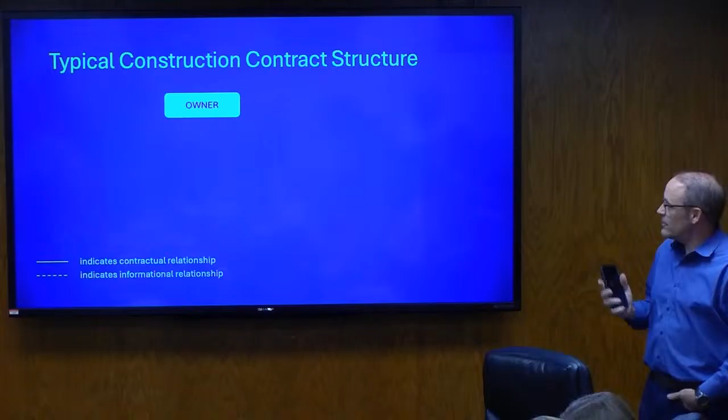So in a typical construction contract, you have a landowner who wants to build a project. The first thing that usually happens, and that's what happened here, is to hire a geotechnical consultant to go to the site and do a soils investigation, which was done here, very thorough. The next thing is to hire the design team, the architect, who then contracts with the civil subconsultant who designs the site, as well as the structural engineer who designs the building, and other subconsultants. Then the soils report and information from the geotechnical engineer is provided to those subconsultants to base their design upon.

So that's the relationship there. Then the prime contractor is brought on board. In this case it's a CMGC. We were brought on early in the project, before the design was complete, to provide consulting, scheduling, cost analysis, and constructability reviews, those types of things. And then once the project is designed, somebody...

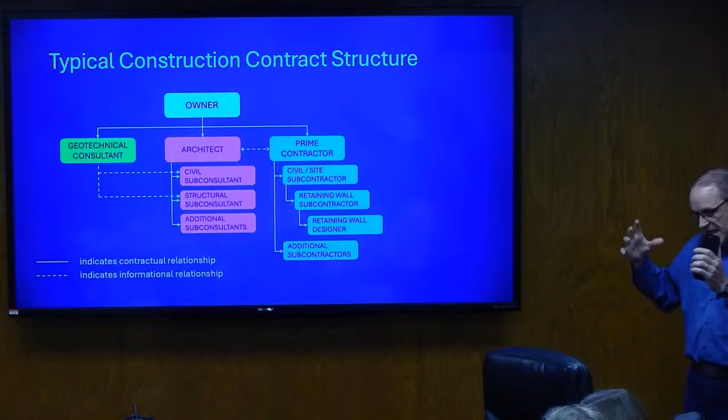For people in the audience who may not know the acronyms, can you explain what CMGC means? Oh yeah, that's good, thank you. Yes, please, if I get into the lingo, just stop me. So CMGC is a construction manager, general contractor. Typically in that type of contract, the construction manager comes on early in the design process to provide consulting, and then once the project is bid out to the subcontractors, becomes the general contractor to build the project.

So it's kind of a hybrid type contract. Is that helpful? It would fill both those roles of construction management and general contractor, as you transition from design to actual build.

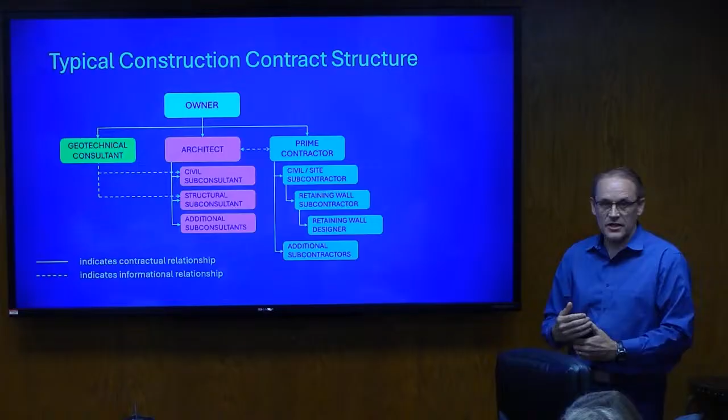We call it pre-construction services - that's before the project bids out and breaks ground, all of that consulting work. Cost analysis is really the biggest thing: cost estimating, constructability analysis, suggesting alternate systems or materials, especially with the supply chain the way it is, sometimes things aren't available, so we'll recommend changes.

Can I ask some questions about the lines? Please do. So my understanding is that the architect and you are not contracting with that geotechnical consultant - we're contracting with that consultant, and then they're just providing the information. That's correct. So if there's a problem with the geotechnical consultant, that's between the owner and that consultant, and you have no role in that.

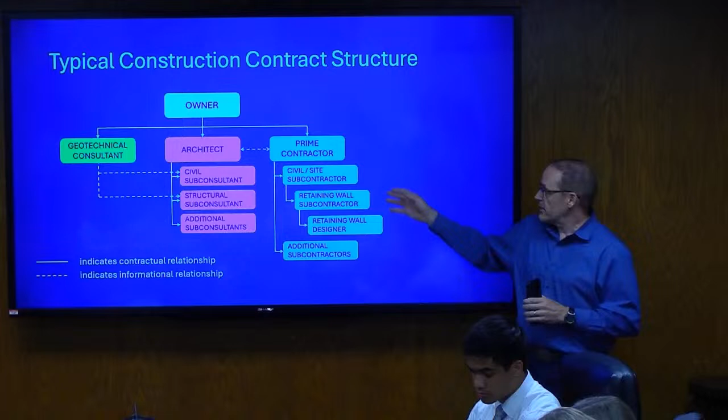Right, that's a contract directly with the district. AGEC is the geotechnical consultant, FFKR is the architect, and Hogan Construction is the general contractor. As general contractor, we contract with the various subcontractors. The civil site subcontractor is Hadco Construction, and their subcontractor was the retaining wall subcontractor that built the retaining walls. Of course there are lots more engineers and subcontractors, but to simplify, that's the orientation here. Is that helpful? Any questions so far?

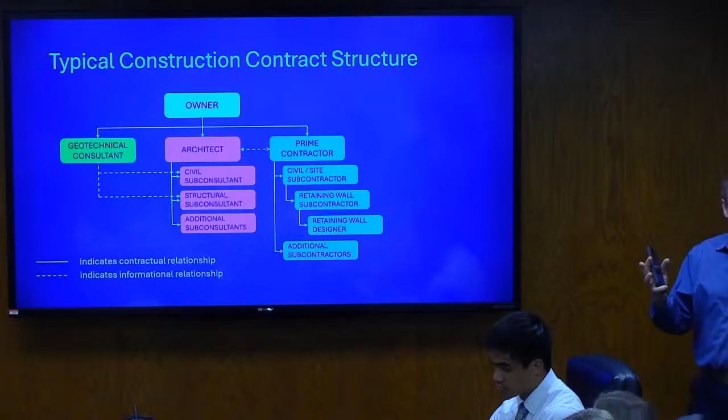So overall timeline: in August of 2020 is when the geotechnical study commenced. There were 3 borings at various depths, 40 to 60 feet-ish deep, and 3 trenches that were dug. It's a very thorough, detailed technical document - dozens of pages, figures and charts. That was standard practice and procedures were followed, a very thorough analysis. The district's due diligence also included some other studies, as is typical on construction projects.

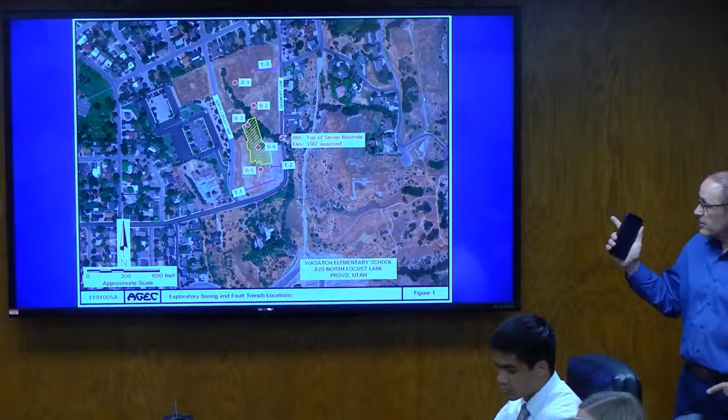Can I ask a question about that? I understand you're not the geotechnical engineer, but in terms of the timing of digging those 3 borings in August, from speaking to Utah geotechnical engineers, that's a time when you can expect groundwater to be low, actually. So I'm curious - was there ever pushback that this might not be the time when we'd get the information we need? Yeah, and it depends on the site.

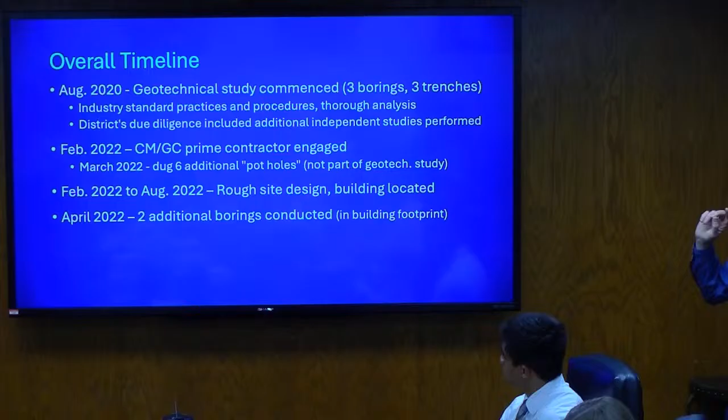Because groundwater fluctuates year to year and season to season. Actually, it depends on where you are too, but August oftentimes is the highest groundwater because it takes so long to penetrate and recharge the aquifers. I spoke with people who do this, and they were saying maybe that would not have been the case on that site, so I was just curious. And it depends on the soil too.

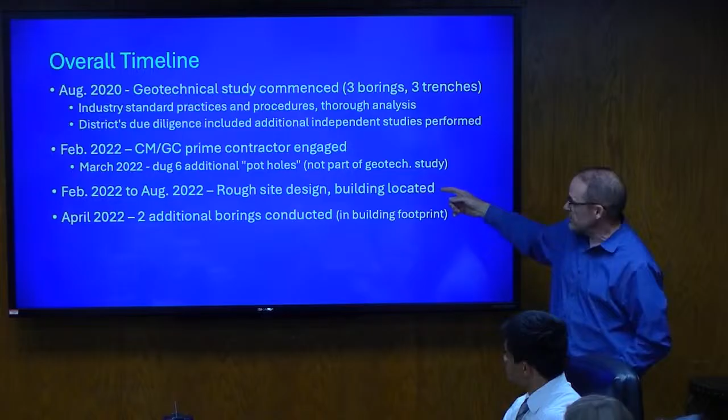The other interesting thing is the design of the site, not the building, continued through this time frame, February to August of '22. As soon as Hogan came on, we went out and dug some additional trenches just for our own use, not part of the geotechnical study, just to see what was there. Then once the building was located, 2 additional borings were drilled in April.

Can you point out on this where the issue is, where we now know the issue to be? Yeah, so the very south portion, right here, the parking lot just to the south of the buildings, and the retaining walls. But where's the water coming from? Well, that's a good question. We still don't know.

I don't think people know where it's coming from. We have some ideas which I can share. The contractors aren't geotechnical engineers, civil engineers, or hydrologists, so we have our thoughts that I'll share, but they're just ideas.

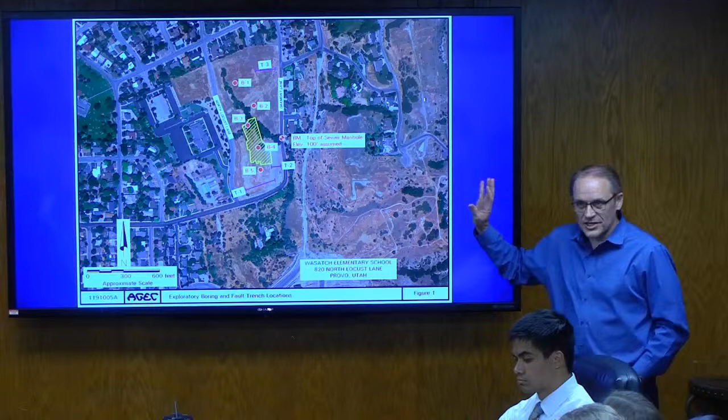Other questions here? Could we just make sure we understand that AGEC was our previous one from when we were buying the property and going through placement? And then IGES, who designed the wall, were also the geotech during wall construction, correct?

Yes, I did the design and observation. So the design engineer for the wall, the soil studies, all that stuff to do with the wall was through IGES, for the wall. Just clarification, thank you so much. Yeah, that's why I wanted to start with kind of who's who, because it can get complicated. Any other questions here?

Okay, so the final report, maybe Jim could talk to this better, but basically the final report was issued in April of '22. The upper portion on the north side was a lot of really granular soils. From the report, it called it an alluvial fan deposit - those are technical words that an engineer understands. The lower southern portion had up to 11 feet of undocumented fill, which means somebody over time had just put dirt there. It's not any kind of special dirt, it's just undocumented.

And underneath that was this clay sand mixture, and underneath that is this lean clay that I think we're all talking about. The soils report categorized that as redeposited Lake Bonneville sediments. The key point is no groundwater was present in either of those, in any of the trenches and borings, at either August or April.

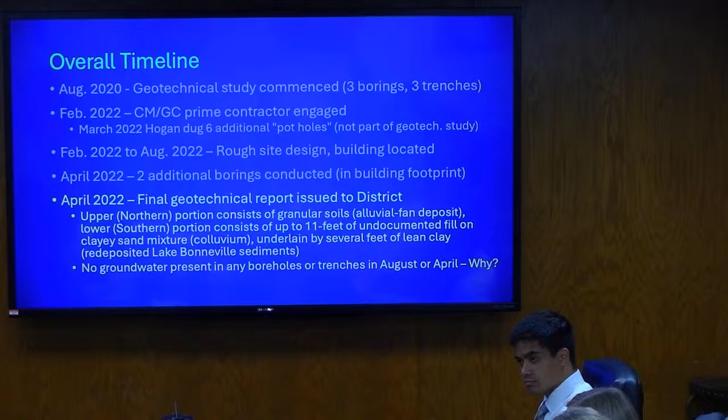There was the canal that went - can I? Yeah, there was a canal, but it also shows that water was flowing from Oakmont Lane down onto Locust Lane. This is just a summary of the minutes, but the minutes go into this in quite a bit of detail. This was on July 27th, 2022. So I'm confused about why we would talk about there being no groundwater, when clearly we're addressing this issue that there was water present on this site.

Are they talking about water that was flowing on the roadway, coming onto the property? Possibly, but wouldn't that still be something we'd have to mitigate for? Yes, so there's a concrete wall at the very top of that hillside, right next to the sidewalk. For that reason, because during the design process that is something I do recall, is that they've had issues in the past where during large rain events, water does jump the curb and come onto the property. So there was a concrete wall built at the very top of the hillside to act as some type of temporary barrier during those events - it goes all the way down Oakmont.

Could there not be water that's draining through that and seeping through? Because as you guys are describing this in these documents, it talks about seepage coming through, so it seems like while it's below the building, it's somehow getting back behind there and seeping through - it's not coming up from the bottom. We don't think that that's groundwater, but it seems like we already knew this was happening, that this was a possibility, right?

That water, as I understand it, I never witnessed that water flowing over the curb. As I understand it, that was only during certain rain events, and it's not something that was expected to be a consistent flow of water.

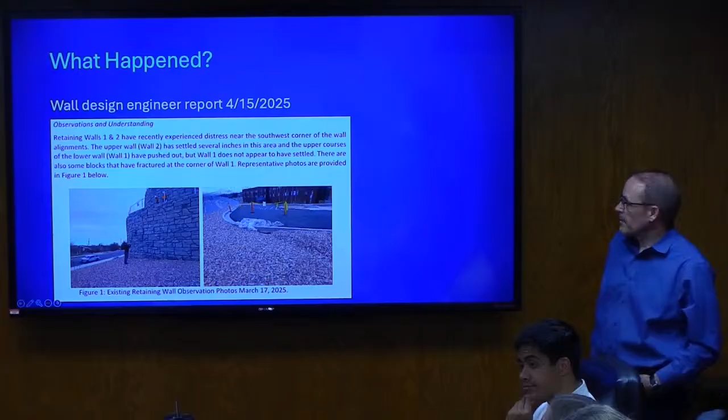If you'll go to the next one as well, this is trying to answer what happened. The perspective of the photo is a little deceiving—the light pole is vertical, and this is the same vertical line. You can see how this bottom wall has leaned out at the top, and by leaning out it created space behind for the upper wall, which then basically settled as a mass.

But if it settled, wouldn't you see cracks going horizontally instead of the bulging we see just vertically on the corner? So this is where it bulged out—that's where you see the separations and the cracks. Right, but the upper wall basically just dropped.

And that's what I'm wondering about—if that upper wall dropped, as I look across that wall, I would expect to see some cracks horizontally where it's uneven, unless you're saying the entire wall dropped evenly. It seems like you would see that—is that incorrect?

So what you're saying is, if this really settled, it's probably not going to be the whole wall that collapses—there should be something happening here. Correct, so why is that not the case? Why would that occur if it's actually settled?

Can we go to the picture that shows the retaining walls? It's a little bit deceptive. The concrete's actually not really holding anything. There's geogrid that goes back into the dirt.

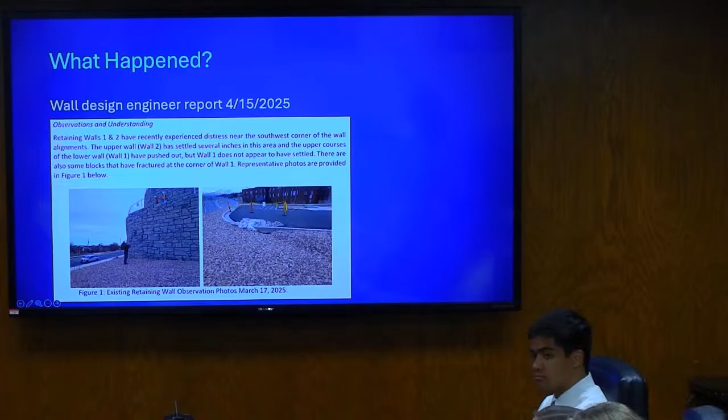Just like John said, these are mechanically stabilized earth walls, MSEs, if you've heard that term during this process. The block is there to help contain the soil, and the geogrid is connected to it. That geogrid reinforcement reinforces the soil and helps provide strength for the soil to hold up.

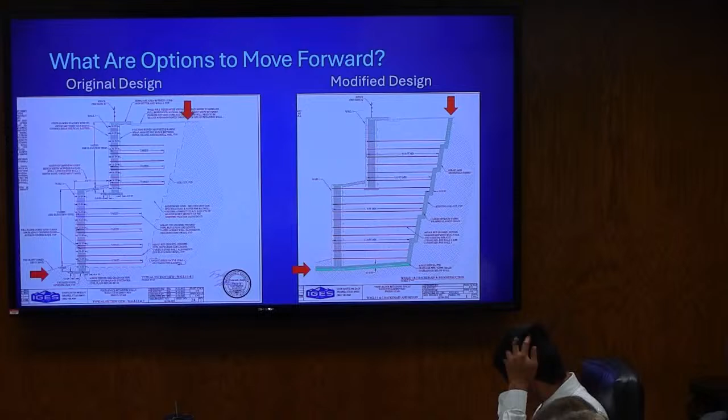The geogrid he's talking about is those red horizontal lines, on top of every block course. Is that the netting, the black netting? Yeah, the black netting stuff - you see they've ripped out a lot of it.

Some of the movement you'll see is that geogrid, when it comes loose, it's about 14 feet back on some of the walls. It'll pull in one piece, so you'll see large chunks moving together because it's tied together.

I think what they're asserting, correct me if I'm wrong Chris, is that the bottom wall became saturated behind it with water, and the hydrostatic pressure forced the wall to bow outward. That's right. And rather than the wall above it falling, the soil behind it settled in to fill that void. The geofabric then pulls things attached to it back with it.

If you look at the sinkhole, it was 14 feet from the wall. All of those cracks in the asphalt are tied to the back of this geogrid. So really, the front of the wall stayed, it's the dirt behind it that settled into that pocket where the bottom wall pushed out and tilted, then there was room, and that's what settled down.

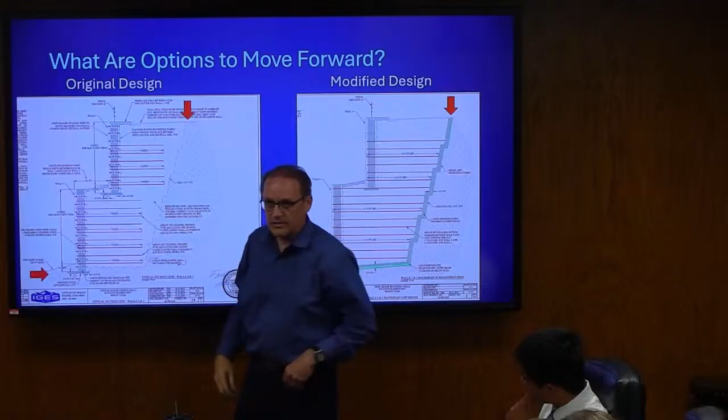Before we go on, I forgot that Terry had a question. No, did it get answered? Okay, move on. Sorry Terry. Don't worry, things are going fast here. So I guess if we're going to keep on schedule, we've got about 10 minutes? You're okay.

This is really important, Chris. Do you want to show them where that water is coming in at that lower wall? Yeah, so the water is coming in about this level. When this was all dug down, the water's entering from about right here, continually.

And I think they need to know that that's all imported fill from the upper side too, right? Yes, sure, everything back there is. This is all the fill from the upper side that was brought down and recompacted.

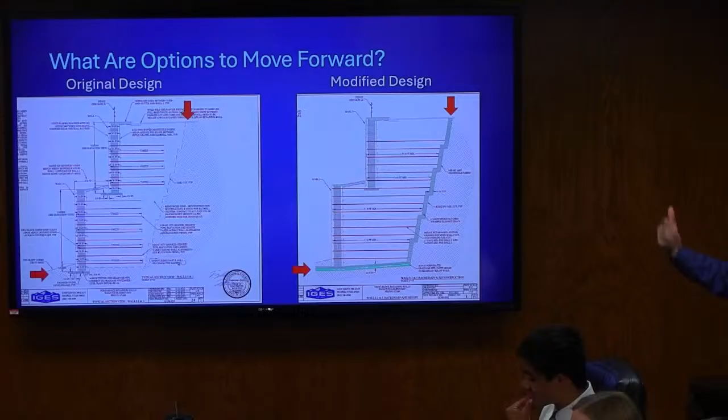You know, that saves multiple millions of dollars to do that. So Lisa, that's a good decision.

Can you speak to the typical amount of drainage planned into a wall like this? Where would the drains be regularly placed? Yeah, certainly, maybe I'll come up and show you - might be a little easier.

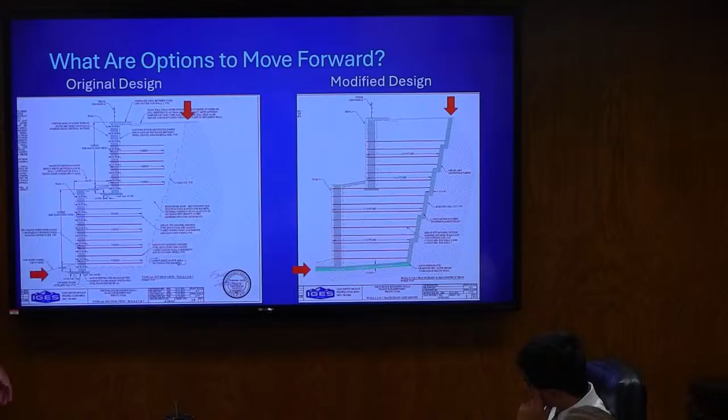In general, we have certain specifications for what kind of material can be placed here. That's why the preliminary geotechnical report is so important - based on the data we're finding, we can determine if the on-site fill is suitable and meets our specifications, or if we need to import certain material. Based on the data, it was suitable for use, so we moved forward with that.

The purpose of those higher specifications is a couple things. You want something fairly granular - you don't want a lot of clay and silt in it, because you want it to drain fairly well. You want it to compact easily, since finer grain soils are really hard to compact. And as well as strength - you want something stronger that interlocks with the geogrid. All of those things combined is why we felt comfortable moving forward with the material at the site.

As far as drainage initially, the blocks here at the face of the wall are hollow in core. I don't know if you guys have been up to the site recently - those cores are filled with gravel as the wall is built. That's generally used as the drainage for the site, and it's meant to be more of a safety measure, not something you want to direct water towards, but it's there to help provide that drainage source.

Is there gravel behind that wall as well, or just inside those blocks? There is a little bit just with the construction process - obviously gravel ravels, so you'll get a little bit that ravels out of the blocks as you're coming up, but not more than a foot or two behind the wall.

We want to talk really quickly about the wall drains underneath those wall segments. So we do have a gravel leveling pad at the very bottom here, six inches thick. That's there mainly to help get the blocks level, and it's a material that is self-compacting somewhat.

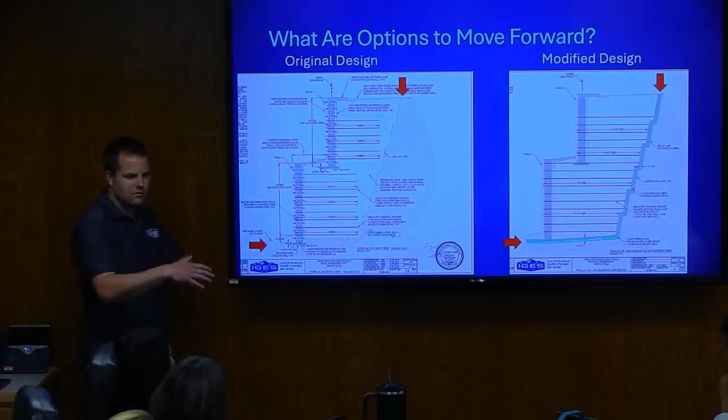So if you just place that gravel down and roll over it with a compactor, it's not necessarily going to need compaction testing. The idea is you have something that can shift slightly so you can get the blocks perfectly level. There's a drain pipe at the very bottom of these walls, and again that's meant to be more of a safety measure - at the very bottom, that pipe is daylighted out under the block.

There's one at the very bottom of each wall, and it runs along the entire wall length. Were those - could you see water coming out of those?

Actually, most of the pipes are there kind of just to help provide water a little more of a pathway. What we saw in this case, when we came down and dug a trench out, a lot of the water had already backed up because of all the material in front of the wall, which hadn't allowed it to escape.

Once they dug that out - Tanner, you guys were the ones that dug that - it just gushed out, didn't it? We actually had it to where that bottom-most green pipe was in the air, only 8 or 12 inches, but the water was draining below it. The pipe was dry, and the water was draining below it.

Which is what I would expect with it sitting on 6 inches of gravel. Like Jim said, water's going to go where it wants to go, and it's going to want to go into the gravel down below first.

So these safety mechanisms and drainage options for water that you're speaking to, are those enough to mitigate surface water? Hopefully, yes, that's the idea. Say there's something like a backed up storm drain. The hope is that in a temporary event like that, these do provide enough drainage to let it go through without damaging the wall.

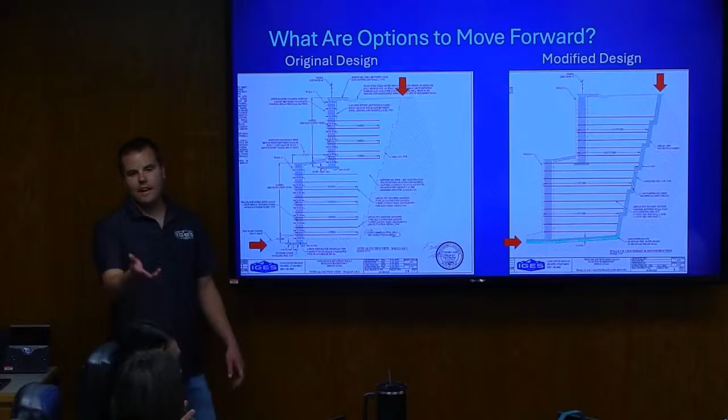That's a tough one to foresee, right? But it absolutely does matter. Or even maybe you couldn't have foreseen it when doing these studies, but now, I'm hesitant because it sounds like we still aren't quite sure where this water is coming from. I don't want to put things back up and then we still have the source.

To answer your question, yeah, things absolutely can change. I've worked on subdivisions where they put the first phase in at the bottom of the hill, and then even 5 to 10 years later they're putting in phases up above, and all of a sudden that starts manifesting water issues down below because you've disturbed whatever pathway that water was taking. So absolutely, more development, it's surprising what it can do to other sites around by pushing water around.

But is there a map that shows where springs are in general? This is how much I don't know, but does someone know where the springs are underground in this neighborhood? Documented springs, I guess. Off the top of my head, I'm not very familiar with that. You typically look at a photograph like this, and if you have some green growing on a hillside, you probably have a supply of water. It's a good indicator, yeah.

One thing that's interesting about this, if you think about Lake Bonneville, all of these were streams coming down into the lake, right? And that's what brought all the gravel and everything down. Right here, we don't know what's around it, but this is all that really gravelly material. It doesn't matter if you build a road across it or put a house on it, that water from up there is still going to get into that and go somewhere.

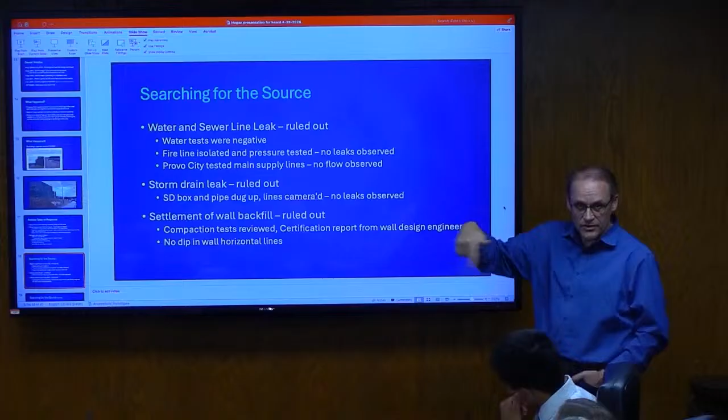So we just started going through all of those. We took tests of the water to see if there was chlorine or anything besides just water. Those were negative. Hadco isolated the fire line and pressure tested it, no leaks there. Provo City, we had them look at their supply, and the meter and their system for testing. There's no flow observed when the school is shut down.

So we ruled out water line, storm drain. You guys ran a camera through all the lines. Didn't find anything abnormal there, no leaks.

We talked about the settlement of the wall backfill, with hundreds of compaction tests and the certification report. And probably most importantly, there's no dip in the wall that you could see settlement. Couldn't see any. So we ruled that out. Let's go to the next one.

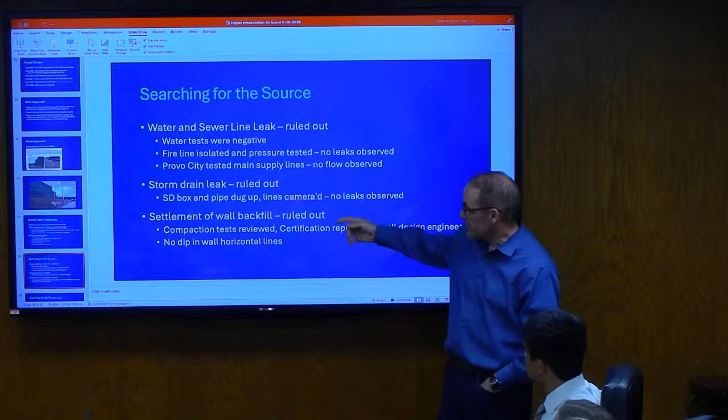So that just kind of left the surface water and some kind of underground water. I don't know how to prove that. Somebody smarter than me has to do that. So then we started coming up with ideas, and this is where it gets kind of technical.

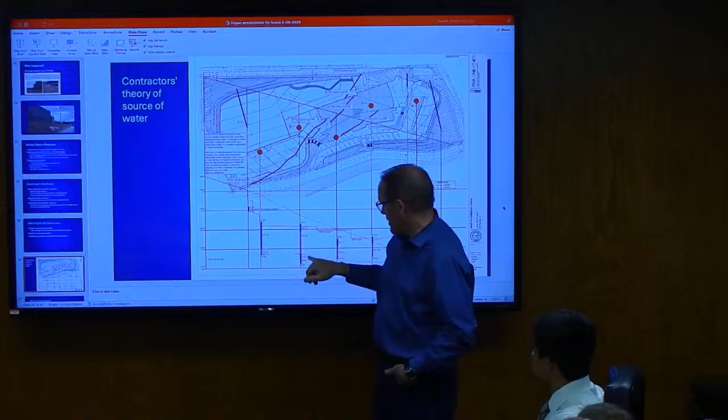So our uneducated, unengineered theory here is that the water's getting into this granular section, hitting this clay layer and coming down to where we put the wall. We basically build a dam right there to stop it, and the water's coming in behind the wall. So that's our offer of a potential idea for what's happening.

So this is from the engineer's report a couple weeks ago. Based on IGES observations, the distress was caused by excessive amounts of water saturating the fill. We've talked about that a lot.

It also adds, there was no evidence of this water prior to and during construction in 2022, nor immediately after construction of the walls in 23. The excess water is a relatively new condition that has arisen from an unforeseen and unknown condition.

So that's kind of what happened and why. Then the big question is, what do we do about it? Can I ask one last question? Sure.

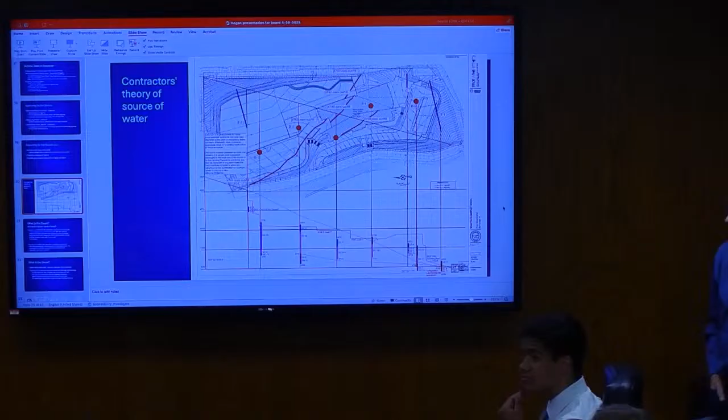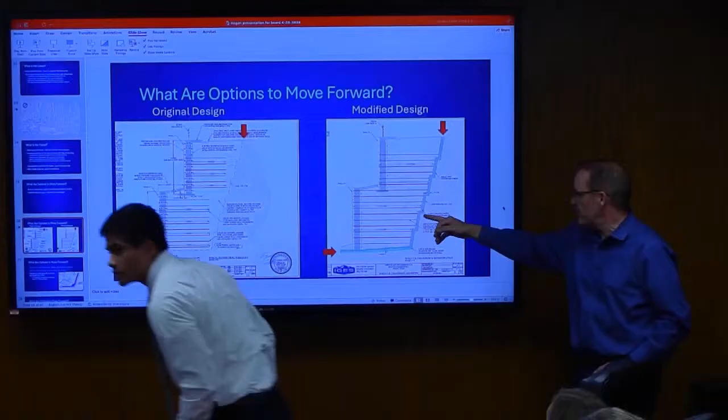As that water was hitting that gravel layer at the base of the wall, is the reason it wasn't continuing away from the wall just due to the fact that it didn't have anywhere to go? Like, why did that build up happen? Was it just too much too fast? Because in theory, you have that layer and then the water builds up and keeps moving away from the wall. Like, once it hit that gravel, what kept it from continuing to move away from the wall versus building up and bulging the wall?

Yeah, so really what I think happened is you have your source of water coming in right here, and that's what we've documented. The question is where is that coming from. But that is very well documented. The water's coming in right about this elevation, and it's very obvious that all of these fill soils have been almost completely saturated, and that water's just kind of seeped through here, and then we've seen it drip out the face of the wall.

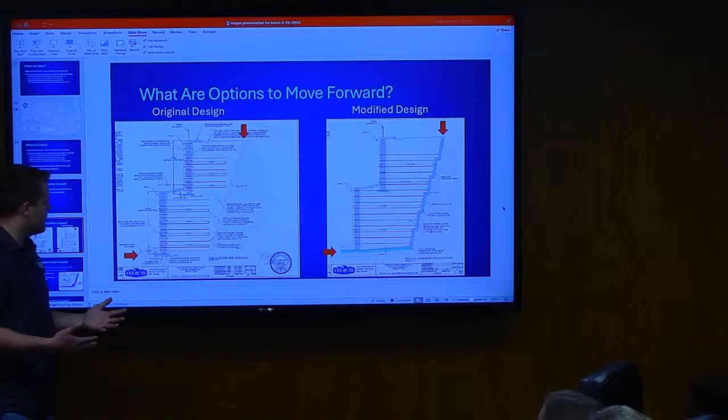The reason, well, isn't the idea that it hits that gravel and rolls down and moves? Yes, it does, and it did. The problem is you want to do everything you can to keep these soils from getting saturated. The problem is water, as it saturates soil, it gets heavier, and it also decreases the interlocking friction between the soil particles. So it's kind of a twofold attack in terms of hillside stability. You get heavier driving forces and less strength resisting those forces.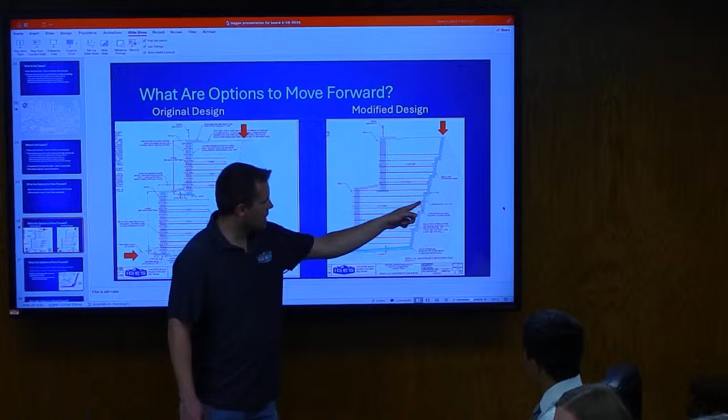So that's kind of what you want to avoid. And the idea is that these are just meant as a temporary measure, not to help provide consistent relief. That's what we're doing now. With the current rebuild, we have a full back blanket drain going in. So the idea is that the water is going to go into that gravel blanket drain and just daylight out below the wall. And what would keep that from filling up with gravel and soil?

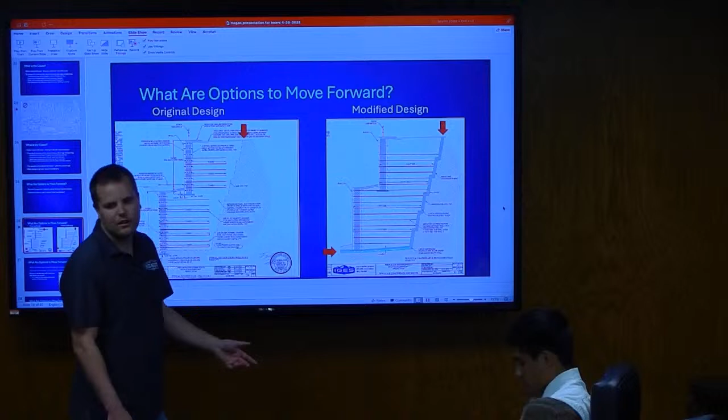Oh, the gravel and stuff. So we have it, it's kind of hard to tell, but there's two faint green lines going all the way up. Basically what they're doing is they've laid against the soil cut a layer of fabric that is designed to help prevent fines. And then on the other side, as they're coming up, they're placing the gravel and placing another layer of fabric on that side. So it'll be double layered with fabric and clean gravel in between. So that's the idea, is that the fix would be to have the water come in here and daylight out below the wall without ever saturating these soils anymore.

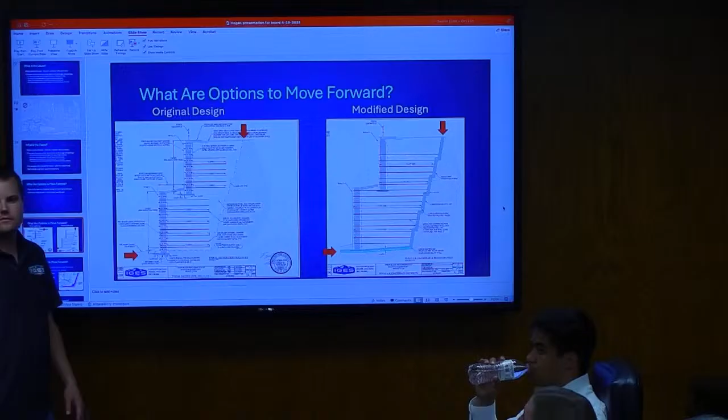So, going back to what you were talking about earlier, when you showed us that horizontal, the section view of the whole site, you're saying it's coming across the entire site, and this is the lowest point of the site. My concern is, if water's going through, are we concerned about settling throughout the rest of the site? Because we're saying water's coming through it, and this concerns me.

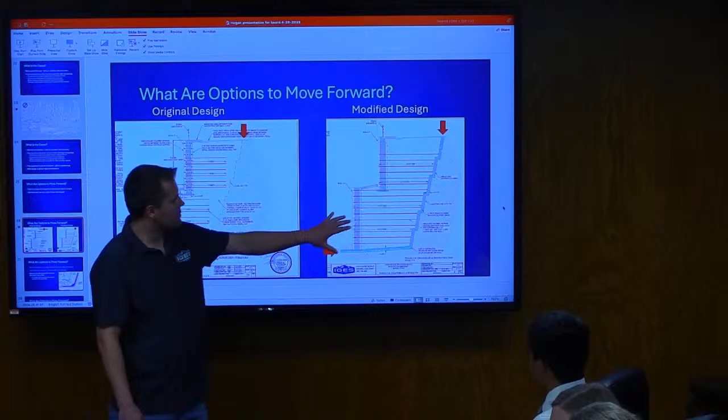It's a very real possibility, and maybe we're jumping a little ahead, but one of my recommendations, regardless of what ends up being finally done, this will get built. But I think going forward it would be wise to do a few more borings around the site and install monitoring wells to monitor groundwater, because we have evidence that outside of where there's wall movement observed, north of that outside corner, there is evidence that that lower wall is still saturated at the face.

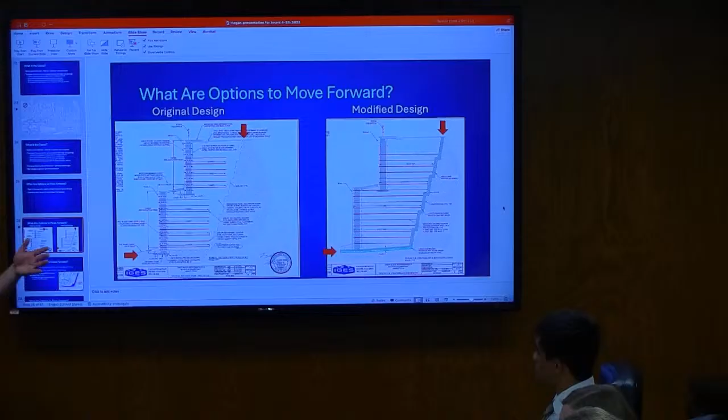I didn't do the observations for the building, but based on my understanding, I think the building's pretty close to sitting on native soils, if it isn't all sitting on native soils. Native soils can still settle and collapse, but you're going to have a significantly less chance of that than fill soils.

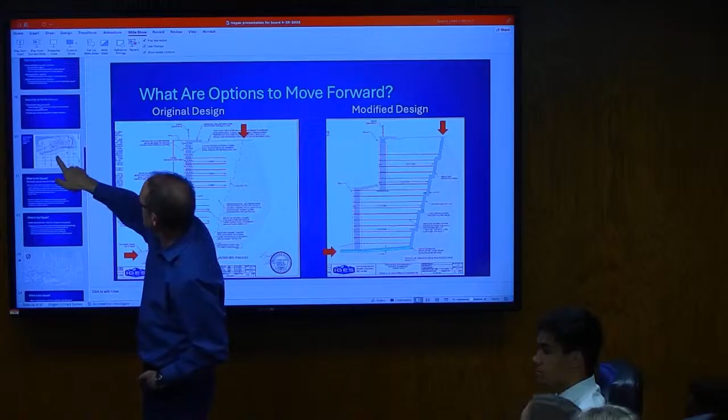So can I ask a question, why didn't we just install this back drain to begin with? That's a reasonable question, and the reason is just to answer your question.

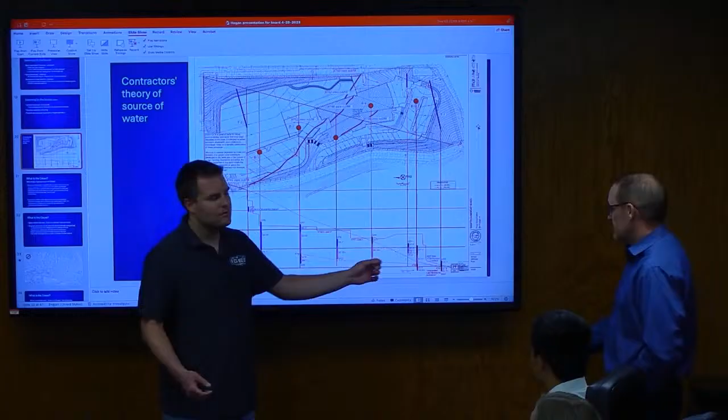So this is the building level, the first level and the second level, and all of this is down here. The problem is with the fill and the existing, that's where it all comes together, kind of in that lowest spot. We have one point source that's well documented, where the water is appearing right at the soil cut. That's what we do know. Like I said, this is just our contractor theory of what might be happening with this clay layer down here.

Can anyone tell us what's actually happening? Because this makes me very concerned. Yeah, and that's kind of where we've been baffled too. We don't know the source of where this water is coming from.

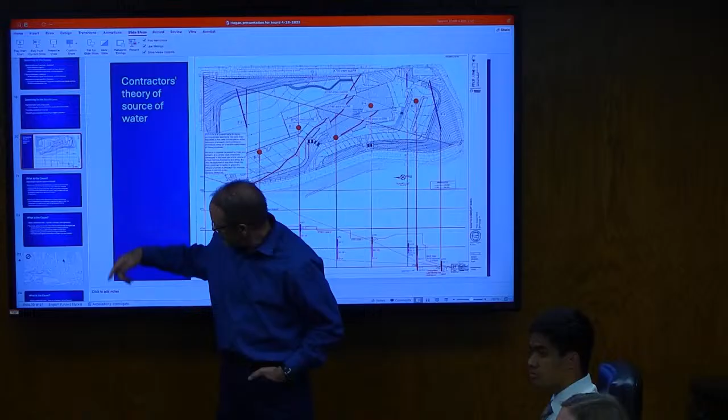Also, with your drain system, even with the fix you just showed us, all of that water still ends up in the same point, and I don't see an exit strategy that looks different than the one that's currently there.

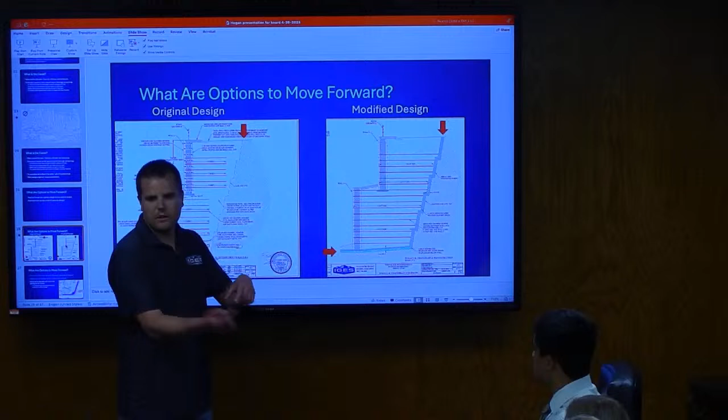If you want to go back to this, we do have a pipe, and this pipe will be tied directly into the storm drain system. This is a perforated pipe, it'll look just like the pipes that come off of your roof runoff drains, but it'll have little perforations in it, all the way underneath the block wall. Then at this point it'll transition to a solid pipe, and that will be tied into the storm drain system.

The hope is that back pipe collects the water that's trying to come through and diverts it back where you're directing the water, as opposed to letting it just go across. Absolutely, that's the idea.

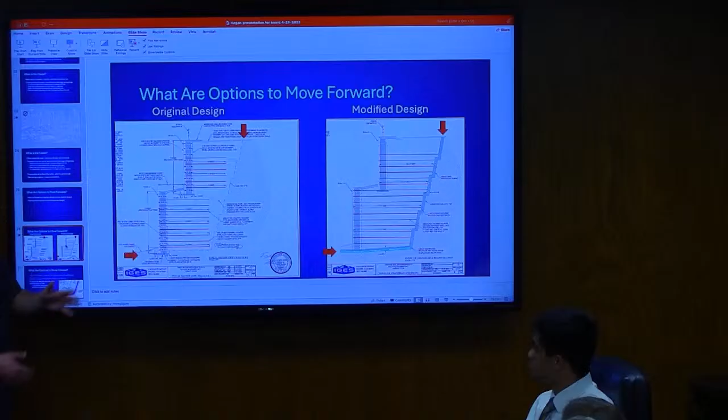Okay, so can you go back to my question about why we didn't install this to begin with? The idea really just comes down to need, because it's not cheap to necessarily install back drains behind every wall. As an engineer, I would be happy to install that behind every wall, but you're talking an extra foot of gravel along the whole length of these walls, 20 feet tall. You're talking several hundred yards of gravel plus fabric materials, installation costs to come in.

So that's kind of the whole point of it - if there is a need, like say that we did know there was some groundwater seeps or springs, we could certainly install that and say, hey, this is absolutely needed, you need to put this in during the design phase. But during this design phase, there was just no evidence of water that needed to be diverted.

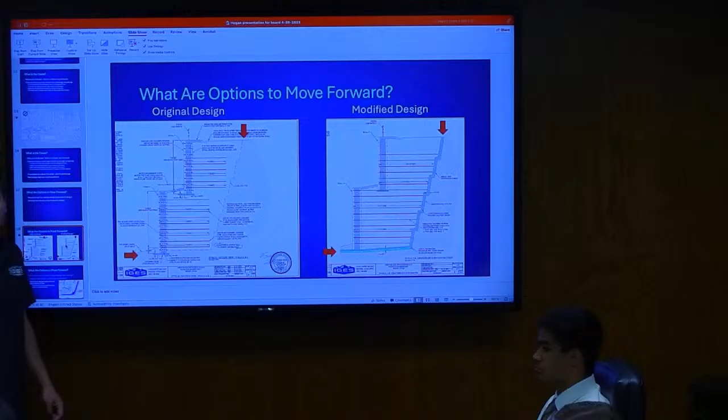Does anyone know if the option was explained, or was it said you could do this but we don't see a need for that, or was it just never suggested? I don't believe it was suggested, because I didn't feel like it was needed to even come up. But does the wall being a fill wall play into that?

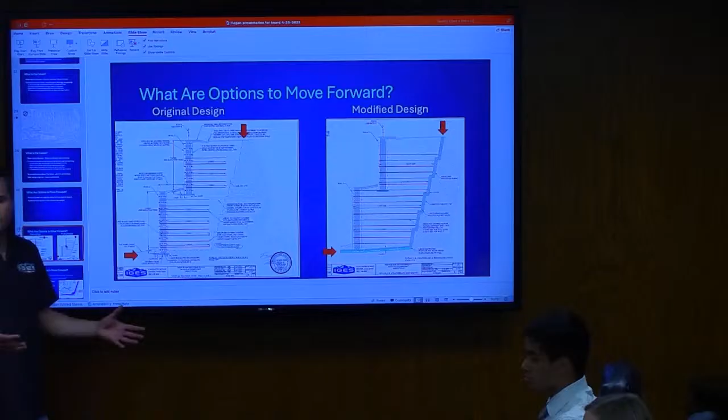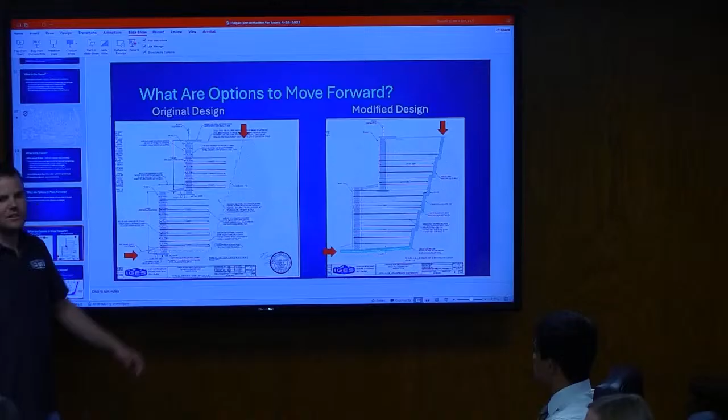I haven't been doing this that long - not 30 years, I've been doing this for 15 years - and I've never seen water infiltrate through fill soils that high up. It's just a little odd.

But if I can interject something - you have to take into consideration this site, there's over 100 feet of fall from the north side down to the south side.

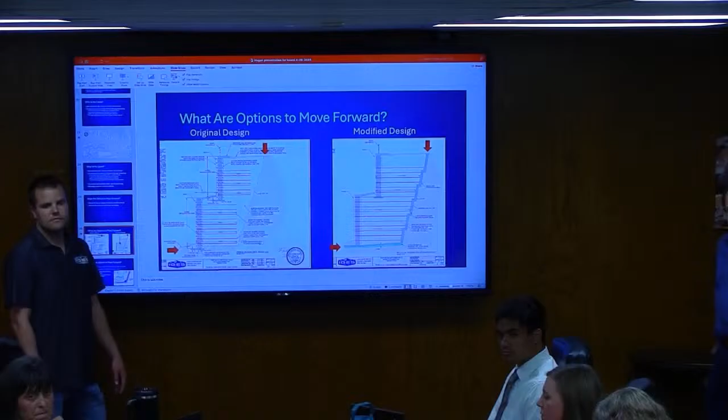At some point in time, what we did essentially was take 50 feet of fill from the north side and place about 50 feet of fill on the south side. So that's the difference between a cut and a fill. We cut from the north, we filled on the south, but at some point in time, there's still those underlying layers, the clay layers and the gravel and the sandy layers that are still remaining.

It happens quite a bit sometimes - any development can potentially move the water around. Somebody mentioned construction above or around a certain area can actually change that water flow, and it's hard to predict exactly where all that water is going to go.

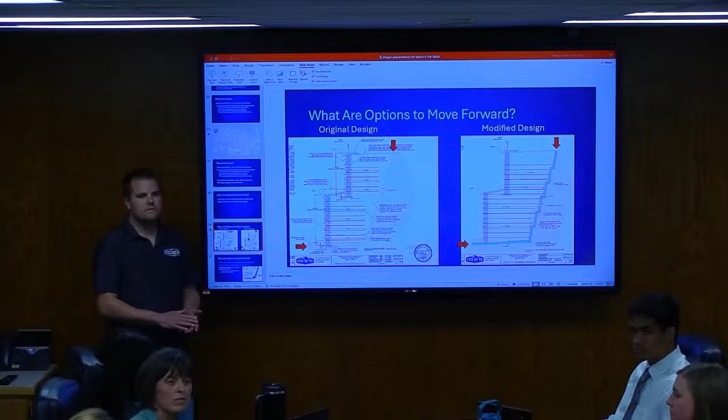But if you're having that kind of a change in height, would you not think that water's gonna flow at some point, because it's gonna go from a higher spot to a lower spot, and that you might need to drain it at some point?

You could always play that what-if game, right? But just with no data to support that, that's kind of why there was no discussion about it.

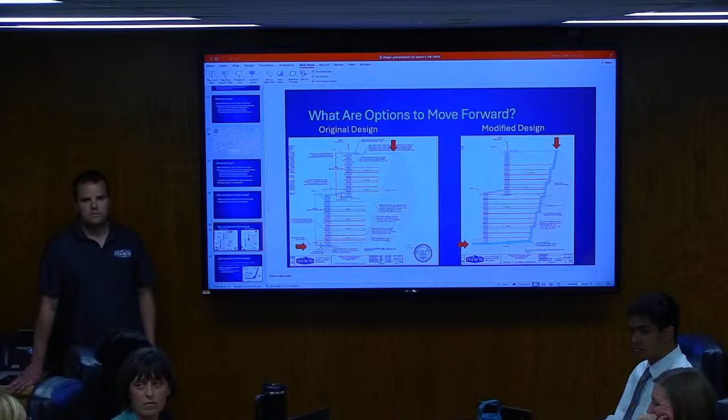When you're doing the geotechnical studies, do you look at historical water levels versus the timing of when you're drilling? Because when I look through some of the studies, I've seen that 22 and 23, for example, are the lowest water in over 10 years. So when you're looking and we don't have water now, let's look at just what data we have. I know this is far from a lot of the well sites in Utah County, but what data do we have around past historical groundwater levels and whether this represents something that's atypical?

Jim, you can talk about that. Sure, yeah, we do look at that information, in a situation where that could be an impact. The challenge that you're having with what you're looking at are really deep wells, and yes, the surface or shallow water will somewhat reflect what the deeper water is doing.

But again, the fact that everything that we encountered was fairly dry with very little water - we can test the soil itself to see if it is near being saturated or not. Because again, the clay isn't going to dry out when it's underground. So those would be indicators or markers if there was water there or not.

So I'm curious, Tyler, you said you've never seen in 15 years fill material collect water like this. You also said that the entirety of that wall, both the lower course and the upper course, sit above virgin soil, native soil, at the spot where we're seeing the issue. At some points as the wall alignment changes, everything behind it is fill material.

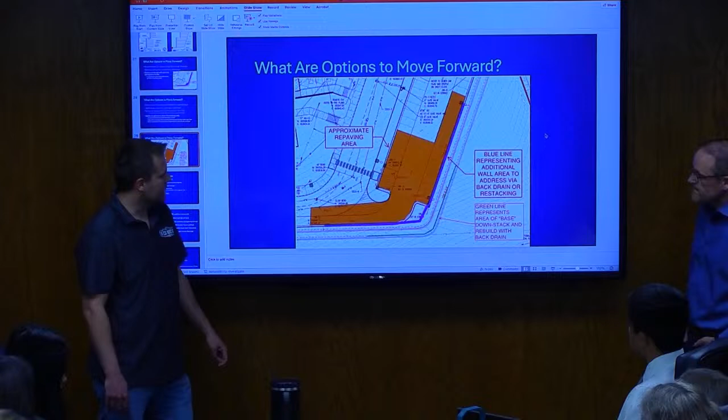So if it was a weak point, why didn't we over-engineer that part? That's just, it's hard to account for how weak that is really in terms of design. It's just something where general geometries make it weak. I wouldn't say that it's necessarily unsafe the way it's designed, it's just a little bit less strong than it would be if it was a straight wall. Would it be beneficial to make it a straight wall then?

I don't think it's necessarily needed. There's plenty of walls that I've seen that have performed really well with outside radii over the years. If the wall's constructed, and I believe with this back drain being put in, I don't foresee any future issues here.

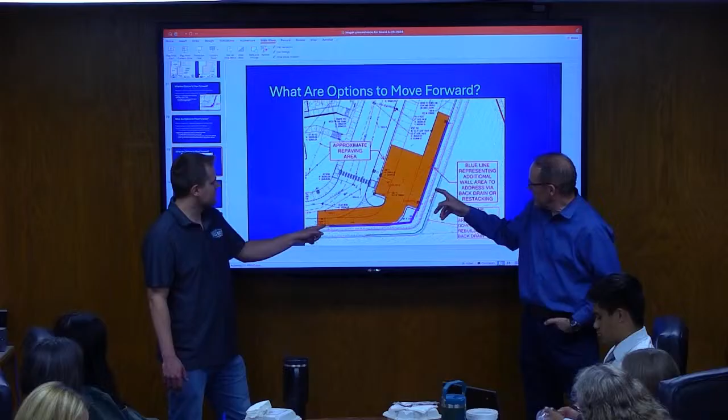The concerns I have is just, I don't believe that as this green line - so this is kind of the area that's been downstacked that's having that put in - the question is whether to do along behind the upper wall, to put in more back drain further north and further east.

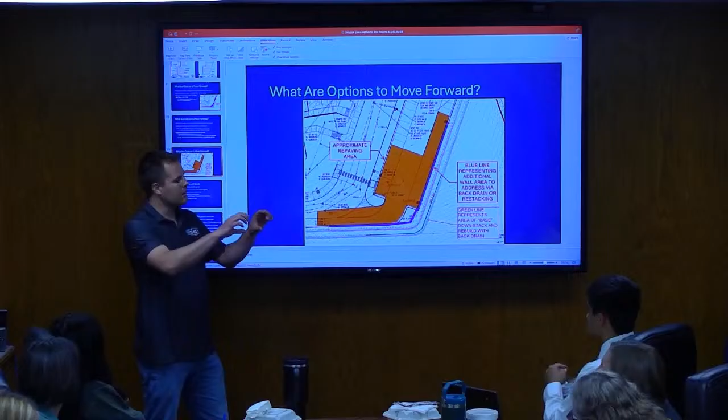What we've seen is where we've downstacked, it's kind of a wedge down, that layer of soil, and I believe it's still exposed - I haven't been up there today, but I believe it's probably just still a couple of feet above the wall. You can see that layer of soil that's fully saturated, it goes right into the hillside and just disappears. That layer of saturation certainly continues on further than where we've downstacked. And we've seen evidence - we had Hadco dig a few test holes at the base of the lower wall up here, and we've seen fully saturated and ponded water situations at the base of the wall further up as well.

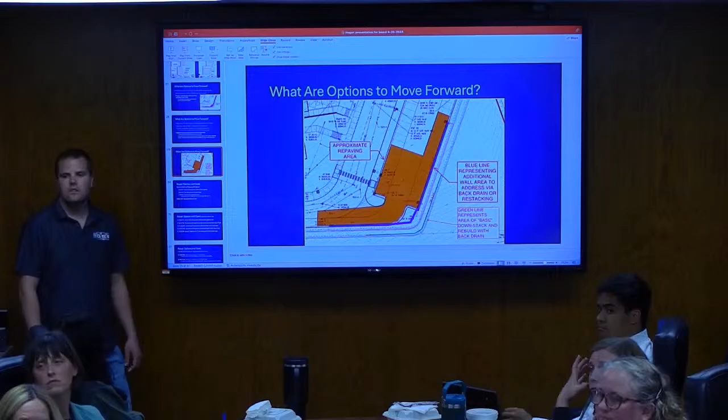Tyler, I have a question - now, as you were talking about the outside radiuses, there are two spots on this very wall that have two outside radiuses, am I correct? Yes, the one to the east, there's another one up there. Are we even concerned about weakness in that wall? I haven't seen any reason to be, no. I haven't gone and looked closely at that other radius. Certainly after this meeting I was planning to go up and take a look at everything, and I can take a closer look, but there's no evidence that I've seen to be concerned about that other one.

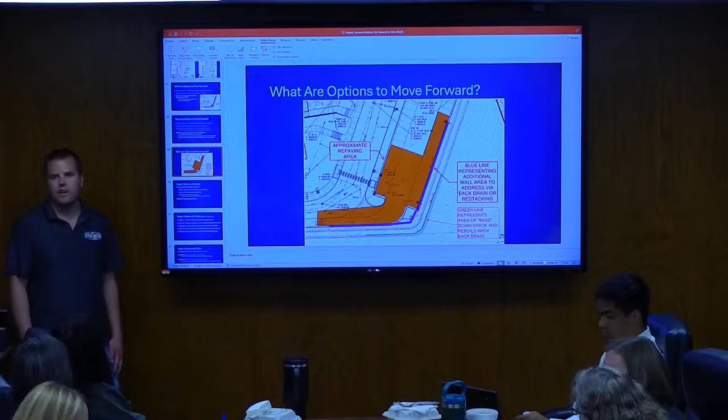Like I said, outside radiuses are done very commonly all over the place, and they can perform really well.

So let's - we do have a kind of a hard stop coming up. So do we have, I saw on your slides you were getting to what can we do about this, the options.

Yeah, and this is a good place to just summarize that. So there's basically the put it back the way it was, kind of the minimal option, what I call the base option - just build it back the way it was. So that's right here. In addition to that, there's an option to put the back drain in behind that portion. There's another - will you click on that one right here?

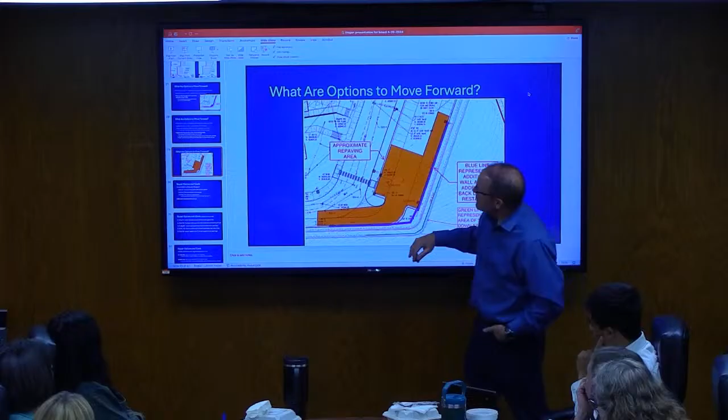Just as we were talking with Kyle and Steve, we thought it would be useful to make the top of the wall concrete instead of cobble. Since it's all gone now, just put it back as concrete. So that's another option. How would that help, adding that in?

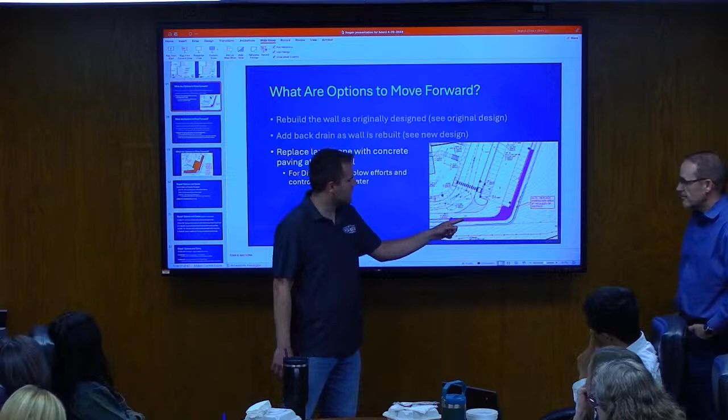One thing I don't believe was necessarily the cause, but certainly didn't help, is I have evidence that during winter, snow was piled up on this corner right above the outside radius where there aren't any parking stalls. At the very least, if all of that was concreted, it's hard to guarantee over the next 10, 20, 50 years of the life of this wall that people aren't going to pile up snow there again. I get that it's a convenient space given the geometry of this parking lot, but if it's all asphalt or concrete, it's significantly more likely that water goes into the storm drain system rather than saturating the soils behind the wall like it was.

Okay, so that's one option. That cost, if I remember, is like $25,000. Just seems like an easy thing.

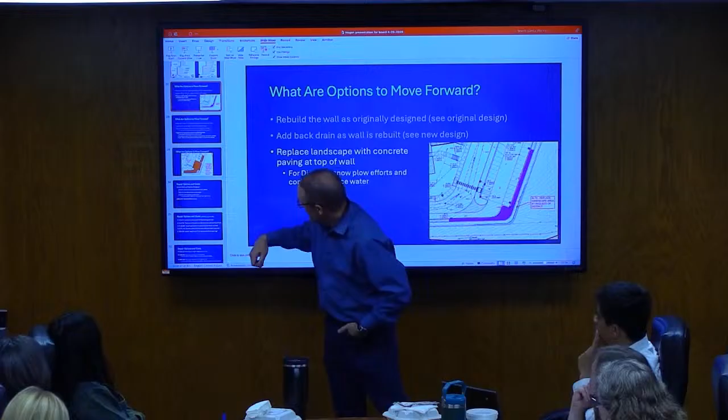Let's see, where were we? Up there, right here.

This orange, Tanner, is kind of your best estimate of what asphalt's going to need to be replaced, and since all of this came down, all of that has to be put back in the end. So that's all in that base price.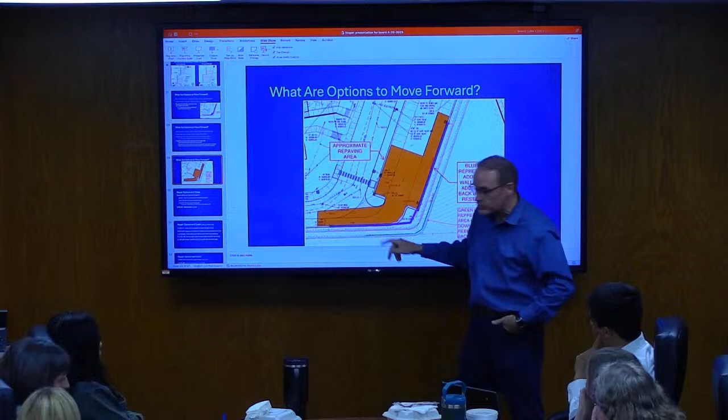And then there's a couple of options. One would be to continue down stacking and basically replace all the wall, pushing it back further. That's quite expensive, so the other option is to dig a back drain trench behind those walls, and we have an option for that as well.

Can I ask a question about rebuilding the wall? Did the actual blocks crack? Some of them did, yes. So we're up to about 50 blocks total that will need to be replaced, which is a small percentage of the total blocks we've unstacked.

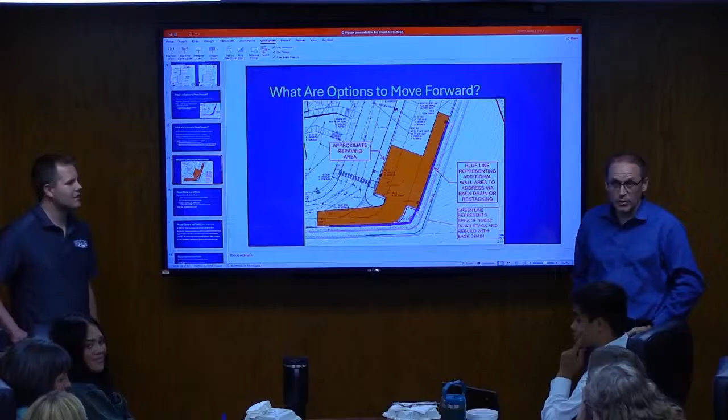Okay, and the other ones, I'm assuming that means the integrity hasn't been compromised. Yeah, we specifically asked the block manufacturer if he had any concerns reusing them, and he said no, absolutely not. So 50 of them will need to be replaced, and the rest can stay the same. So far, that's where we're at.

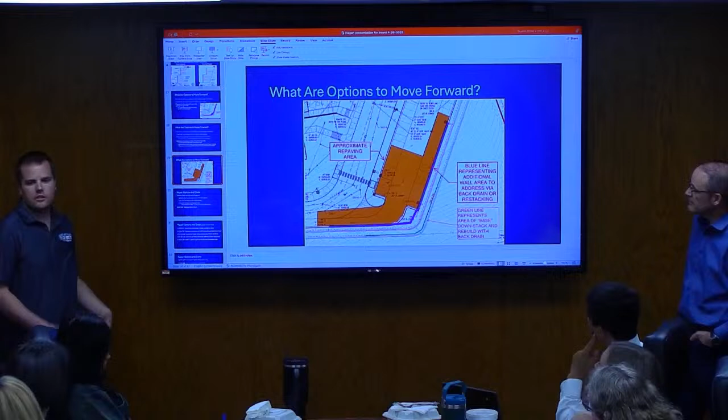And with the GeoGrid, would you stay with the same 14 feet, or would you go up to 20 feet? If you go back up to this image, I can show you guys what our current plan is. Just because in the grand scheme of things, GeoGrid is fairly cheap considering everything else.

So these are the minimum lengths, and I have another drawing that goes hand in hand with this, a generic section view that spells out the lengths. What we're doing with this section is providing a minimum length, but also extending it all the way to the gravel cut. So basically everything that was excavated out is going to be fully reinforced going back, there's not going to be the gap like there was.

Will it include gravel fill behind the wall? Yes, there will be gravel inside the blocks and as well at the very back. But not directly behind the blocks, no.

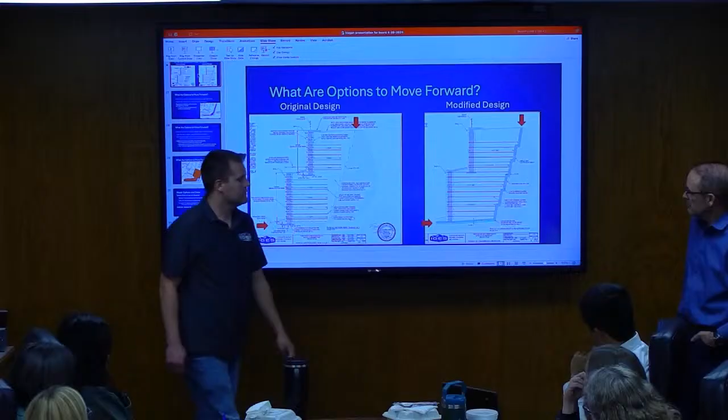So with the new design, will the drains that were under the wall still be there? Yes, as far as the last time I was out there, they teed the bottom one in. They haven't gotten to this one yet, but they've teed this one, and you only see one singular pipe here. I have a good photo of this construction, I was out here multiple days in a row. They actually have three layers of pipe coming down.

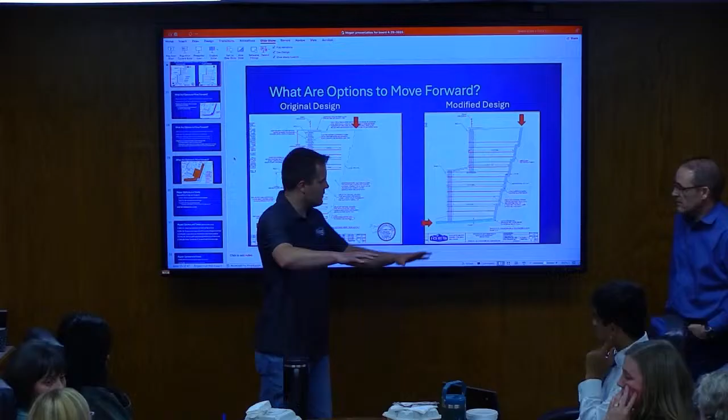All connecting at one point at the lowest point of the wall. So we went all the way to the extent of the down stacking, put pipes there, and then one in the middle, and they even graded the subgrade so it would flow towards this lowest point. So everything is directed to this point now, very well actually.

Yeah, and gravel. This is fully gravelled below too. There's at least a foot of gravel with fabric on top of that gravel at the very bottom. So the idea is that any water hits this gravel, percolates down, and gets down below the wall.

Go out. Yeah, let's see. Let's go, where are we? Let's go to this one.

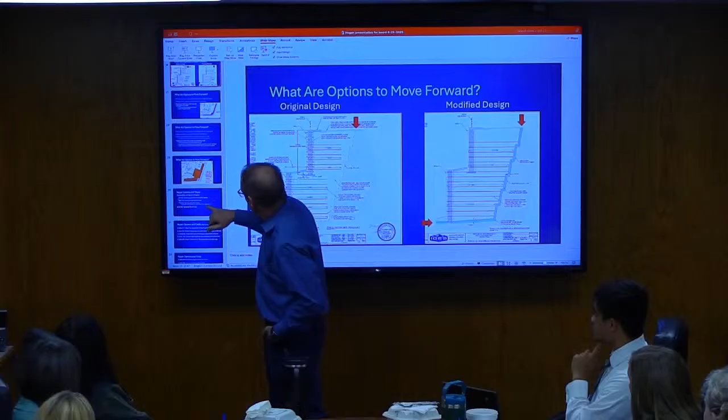Slide 30. So as far as options and costs, I believe we sent you guys the cost for this, hopefully you got it. What I called the base cost is $457,000, just to put it back the way it was.

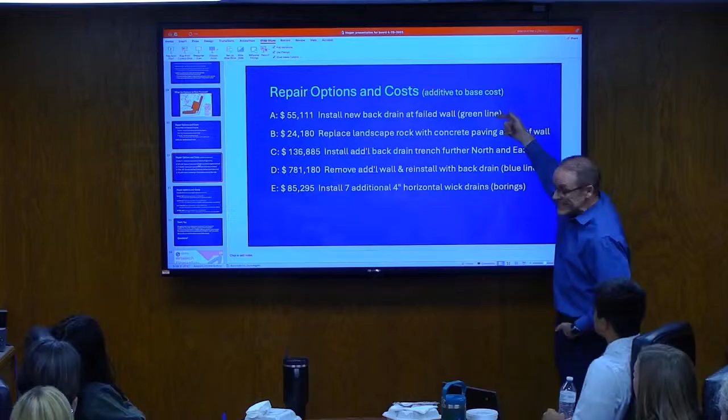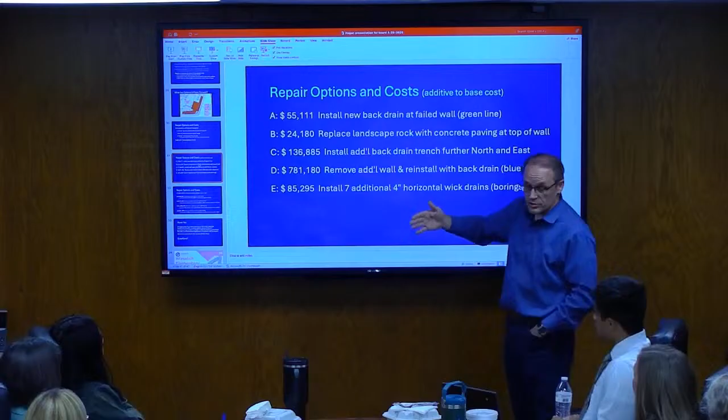Come down to this next one. So the new back drain, the green line on that map, is about $55,000. The landscape rock at the top replaced with concrete is $24,000. To dig the additional trenches we're talking about, the cost is $136,000. To remove and replace the blue walls is an additional $781,000.

And then we haven't talked about this. We're just trying to be creative, but you could drill horizontally back in and put these wick drains in. I don't know how effective that really is. This would be a much better way to do it, but just to have the option.

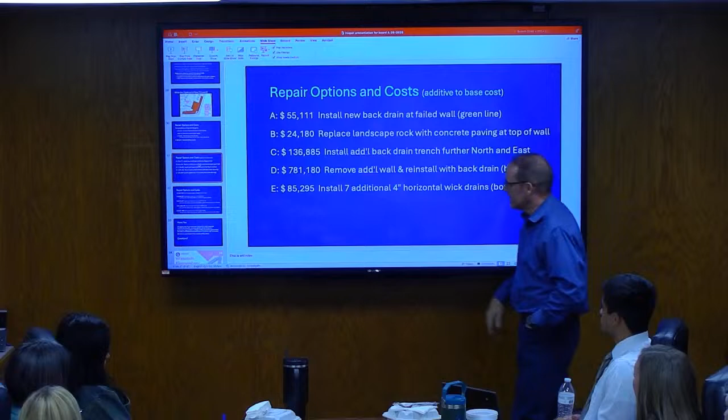So the next one adds up some of the combinations, basically. What's your recommendation? Our recommendation is this one with the additional — put everything back with the new back drain, do the paving on top, and then dig the trenches back behind the other walls. That's the one we recommend, but we know you have lots of other pressures and decisions and factors. So that option 3, when you say additional back drain trenches, that's going in front of the building a little bit?

Is that correct or no? Basically, that's going to be heading north and east, since they've only downstacked to a certain point. Like I said, the saturated soil layer just kind of extends to that point, so you'd be trenched down to that layer further back.

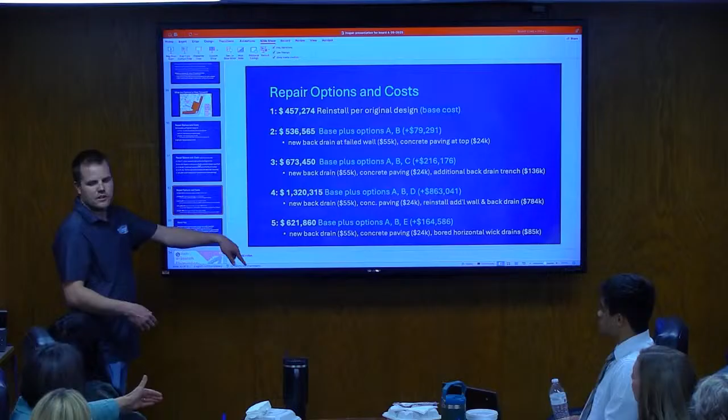Which would mean digging up the front of the lower part of where — you want to talk about how that would impact the front of the building, potentially, with the trench? Yeah, that's what gets it longer. So, yeah, cool.

That certainly would go into that roadway, that drop-off lane that's there. That would get ripped up during that process. Yeah, that's what I was kind of asking, knowing that would be the case, but if it's necessary. It'll get ripped up during the process, but put back afterwards. And how long does this process take?

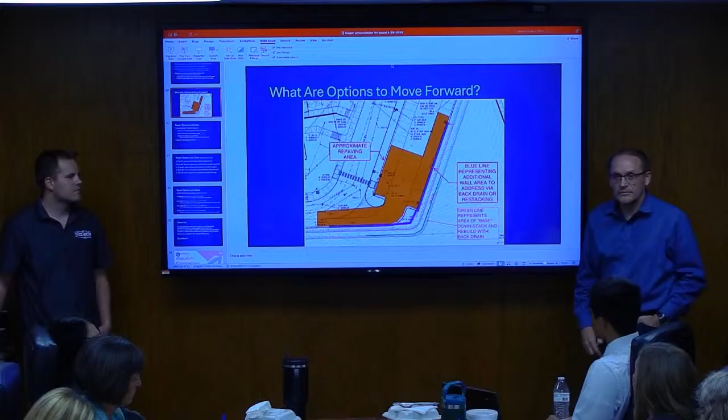Probably — how long did you say? Up to 3 weeks, for the wall part. I don't have a machine that goes that deep, so we have to bring in a special machine, or we're going to have to dig down and tear it, because I think we're 36 feet deep.

Why do you suggest that one and not the one that's more expensive, building the additional wall? Because now I'm getting concerned as you're talking — well, we can't guarantee there aren't going to be other sources of water. What happens if there are other sources of water? Then am I ripping this out again in a few months and starting over with option number 4? Because that's something I can't go back to the taxpayers and ask for, if they're like, why didn't you think about this and mitigate it from the beginning?

And we haven't had a super wet year, so we don't have the record yet to show there's no unforeseen amount of water this year that makes this unusual. Yeah, that's true. So why would you pick option 3 rather than option 4, since you did kind of create some doubt in my mind that option 3 is just going to solve this problem right now, but if we find more sources of water, we could be in a bigger situation, correct?

Could be more problematic. Chris, one of the things option 3 presents to you is simply the option to save the difference between 1.3 million and 675,000. If we get clear onto the north end where our blue line stops, and it's still super wet and we feel concerned, then we can have a different conversation, versus if you say today, hey, go with option 4, you can do the whole thing, and we get through it and downstack it, and maybe you didn't need to go that far.